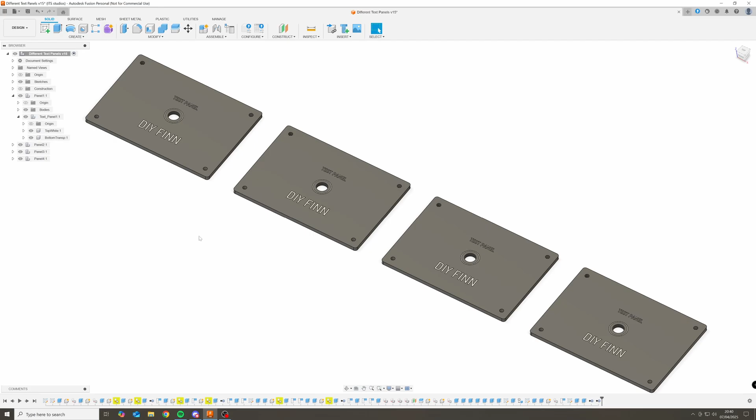Let's get to the design part. Here in Fusion you can see all our 4 iterations. Starting from the first one, the top surface looks the same on all of these, but on the back is where the differences become evident. In our first iteration we had this transparent layer on the back, and then on top we have one layer of white, and this was in our minds the best way to do it.

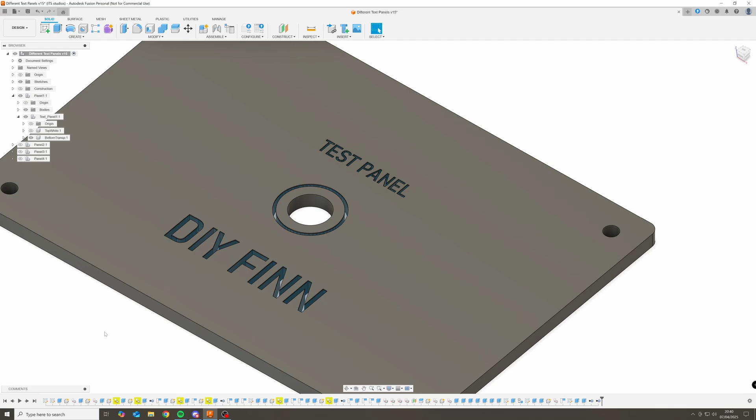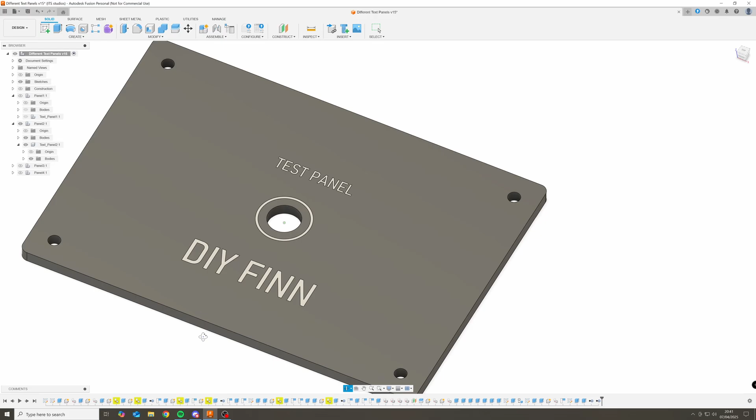Here we have our second iteration, where we realized that we don't need the transparent filling on the back because air lets light pass through easier than plastic. We removed the plastic part and made the white part a couple of layers thick, and this resulted in this sort of looking panel, and the results were way better in backlighting performance, as you can see when we compare these.

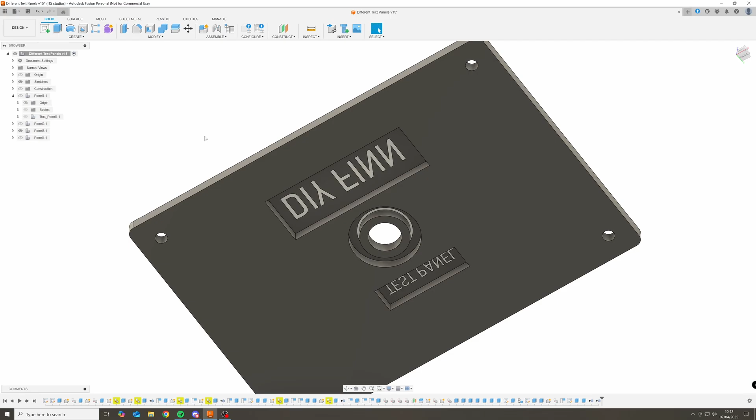Our third option even further optimized the backlighting pass-through by adding deep grooves in the panel on the backside, which allow more light to reach the white text area. The problem with this design, though, was that it lets light pass through the gray area as well, so we did our fourth and final iteration to combat this issue.

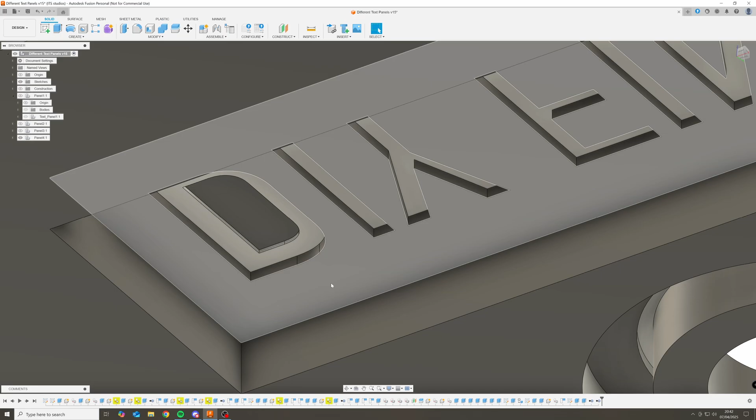In the fourth and current version we have the backside extruded out, but the difference comes in this about 6-layer-thick gray part that is extruded from the text. This enables us to have backlighting that passes through very easily to the white text, but it doesn't shine through the gray parts. Now that I've shown you our iterations and why the fourth option is the best, I'm going to show you exactly how to make this sort of panel step by step, and you can repeat it at home.

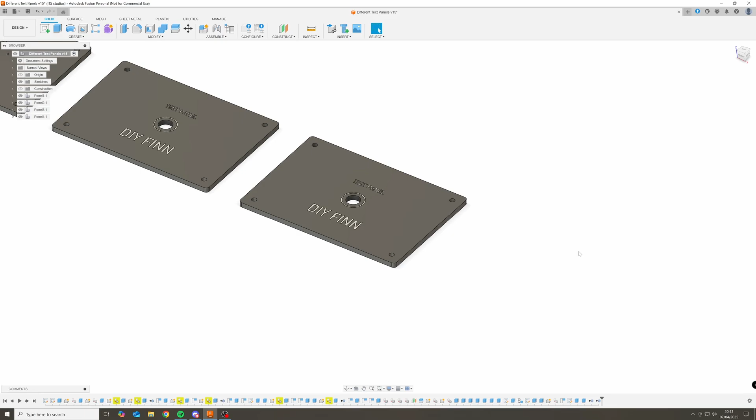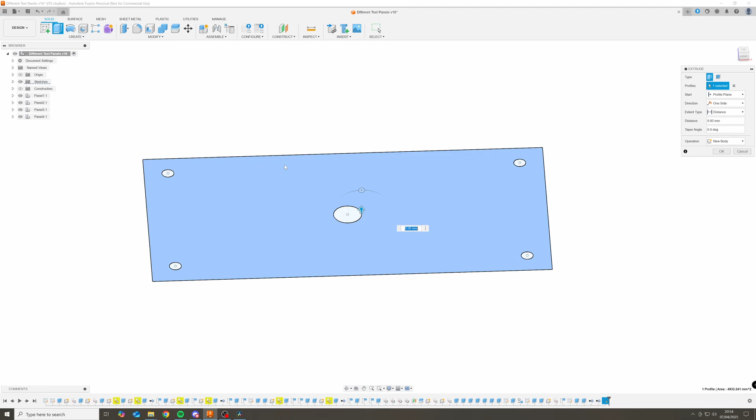Okay, so first we created this sketch, and then we made a rectangle sized 100 by 50 millimeters. Then we created 4 3mm holes, and then one hole in the middle which is 7mm in diameter. After that we were ready to extrude it by 3mm.

While we're at it, why not make some 3mm fillets to make it look good. After all these previous steps we could now start the text, so we needed to create a sketch on the top layer for that.

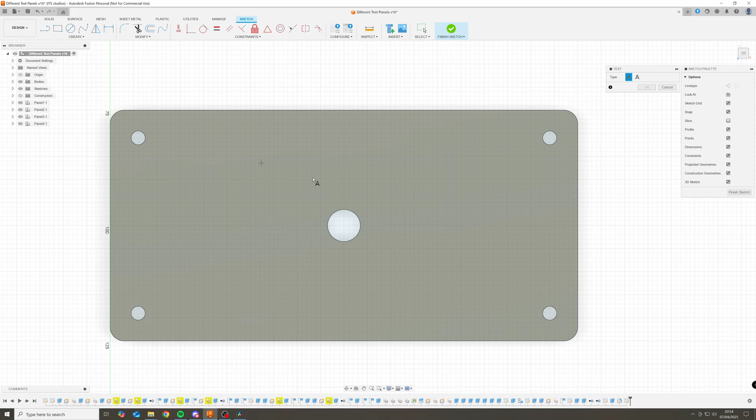Text can be made by selecting the text tool, and we made this rectangle here, which we will place the text in, and we wrote 'test sample'. The height will be 4mm with Bahnschrift SemiCondensed font, and typically we don't use any bolding, but you can use that.

The minimum font size should be about 2.9 to 2.6mm, but it of course depends on the nozzle size. This is good for a 0.2mm nozzle.

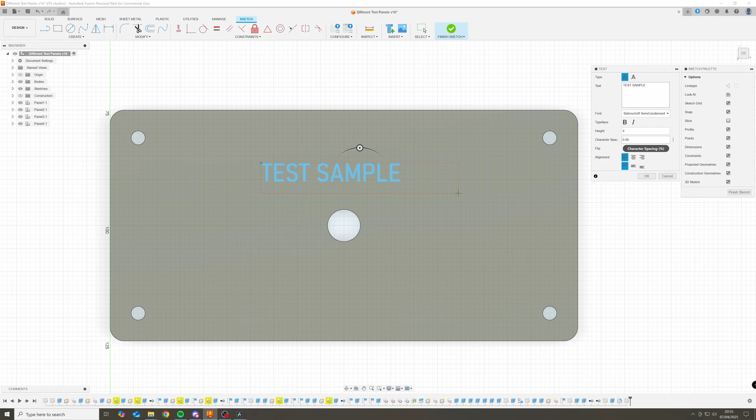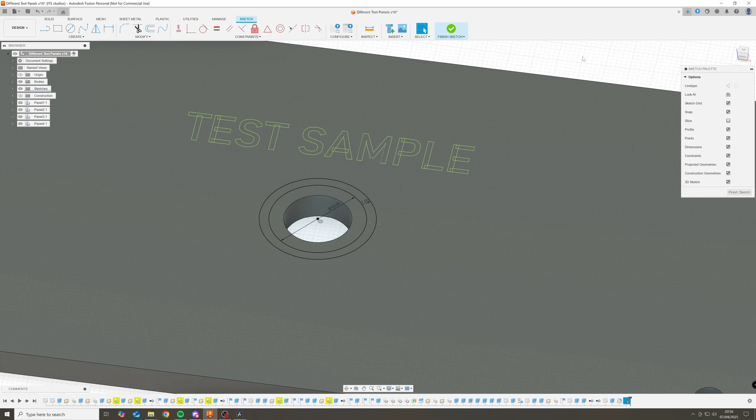For this test sample we also made another layer, which is this circle around the hole, about 1mm in size. Once we had every piece of the backlight done here, we do this very important step to explode the text, and just like that we have basically the backlight layer sketch complete.

Then we select these parts and press invert selection, which is the fastest way to select the text. Then we just unselect the parts we don't want to extrude down.

After that we extrude it by our layer height, which is minus 0.14 millimeters, and then we multiply that by 2 because we need 2 layers.

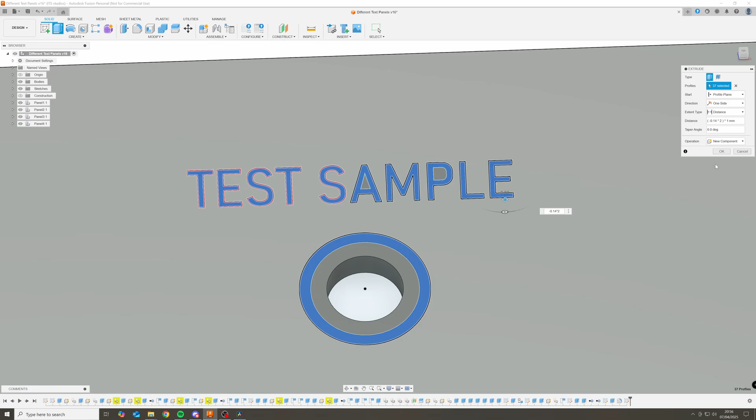Then we create a new component of it from this menu here and press OK, and just like that we have this new component, which includes the backlight text.

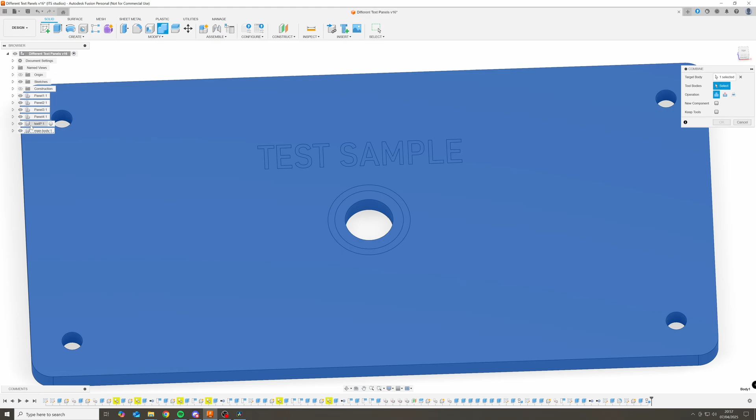And here comes an important step again: we need to create a component from this body, which will be named main body. After that we can go to the top menu, press the combine tool, then select the main body from here and select all of the bodies from the texts, then press cut and keep tools.

And just like that we can see we have cut the text from the main body. We can hide this, for example, and see that it is cut from the body.

The next thing to do is of course the square opening on the back side of the board, so let's do that next.

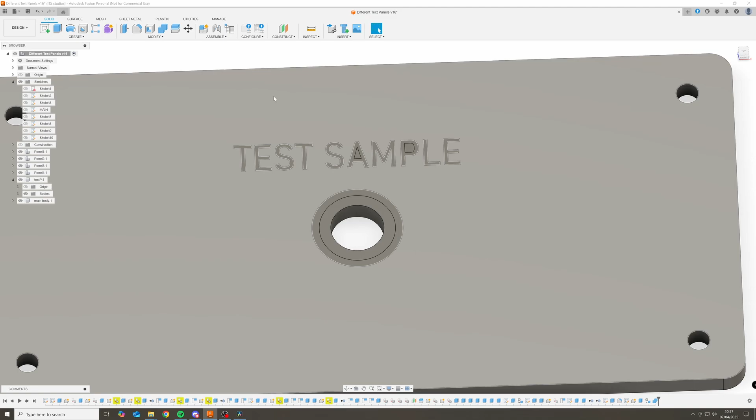First make sure to hide the text component, then open the sketch for the text, so it makes it easier to do this next sketch on the bottom side.

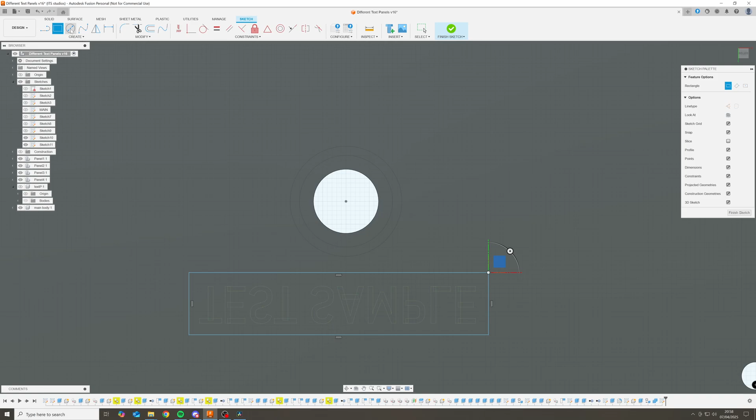Then make a square or rectangle on the back side, just like you want to do, and it should be pretty much the same dimension as the text, but a little bit wider so the light gets through it better. Then select the previously created components you just made and extrude them to the top layer, just like so.

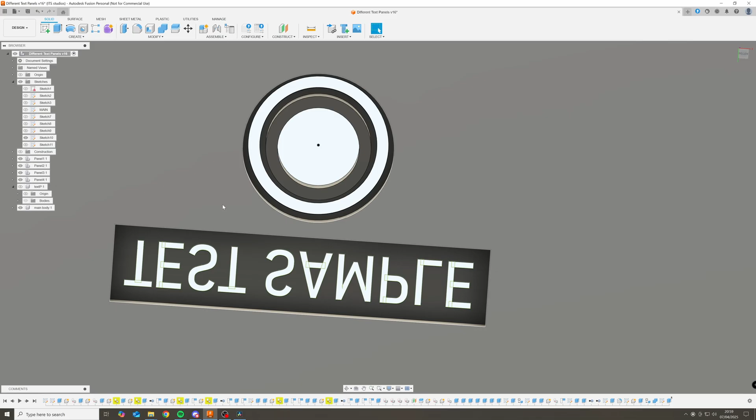Now for the last and most important step: select all of the remaining parts underside here, including all of the text too, and after that extrude it by our layer height times 4, which will ensure the light doesn't bleed after we print this panel, and it should be perfect.

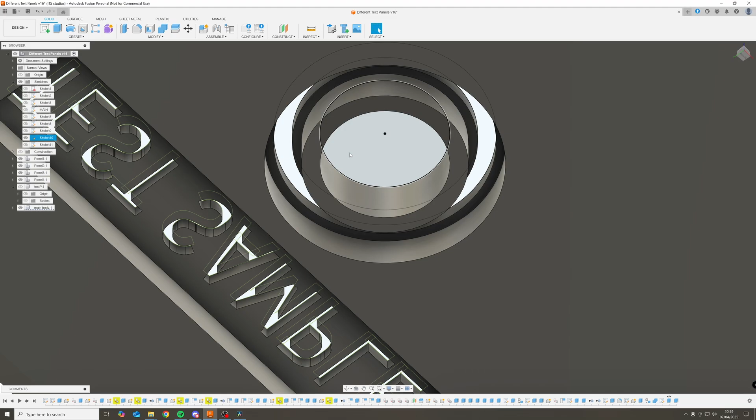And after we apply this material on it, or a different color, it is so much easier to understand how this looks.

Now that we have the text and the main body all modeled in and ready to export, ready to 3D print, one thing I suggest you do is go in the bodies, select all the bodies, click F2, and rename these something like main, so it renames all the bodies.

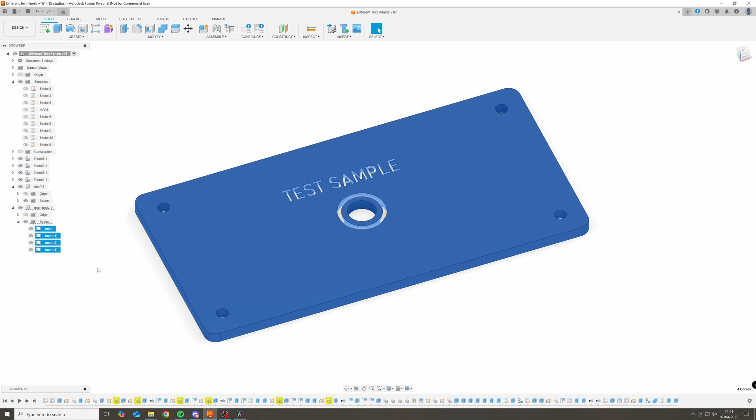Do the same with the text here, select all the text, click F2, name it text. This way, now that we are going to be exporting these, it's going to be easy to see on Bambu Slicer which are the text and which is the main body, because it's kind of hard to realize which is which, and you will see what I mean when we are in there.

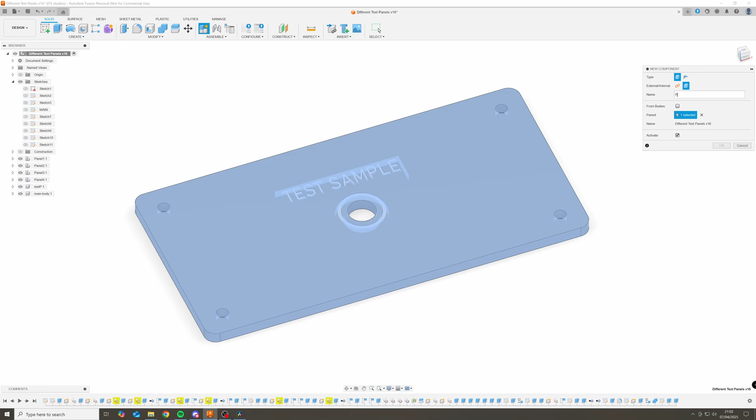And here we can go ahead and save as mesh. You want to use 3MF, one file, and select OK. And then you can export it to wherever you want.

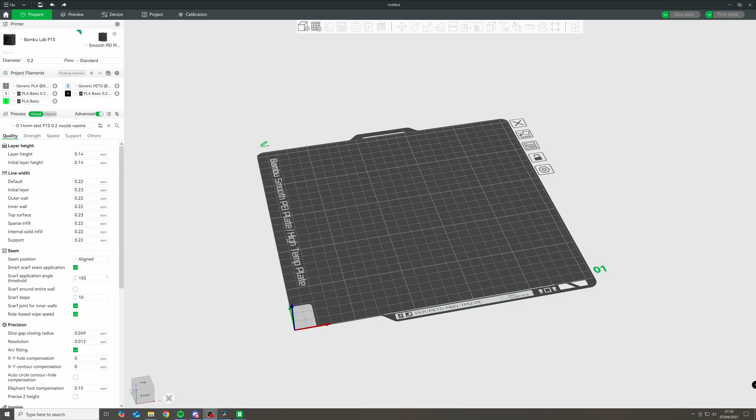And here we are in Bambu Studio, and we're going to bring in our panel here, our 3MF file. This is some random bug in BambuLab right now, which says the 3MF file was generated by an older version of Bambu. Just click OK, it doesn't matter. And this is another bug, which says the object is too small. Just click no, it's not. And then lastly, file contains several objects positioned at multiple heights.

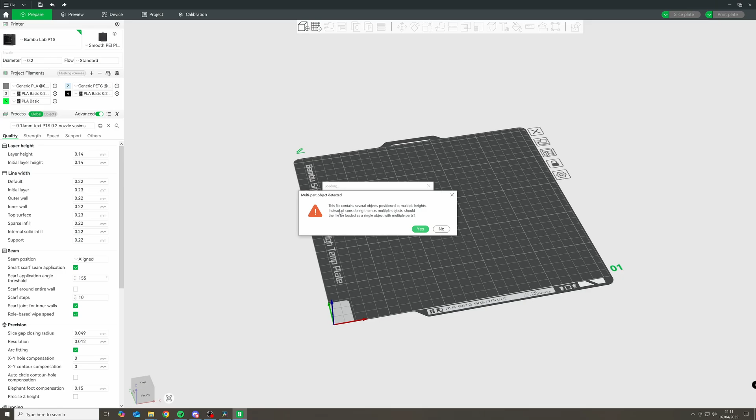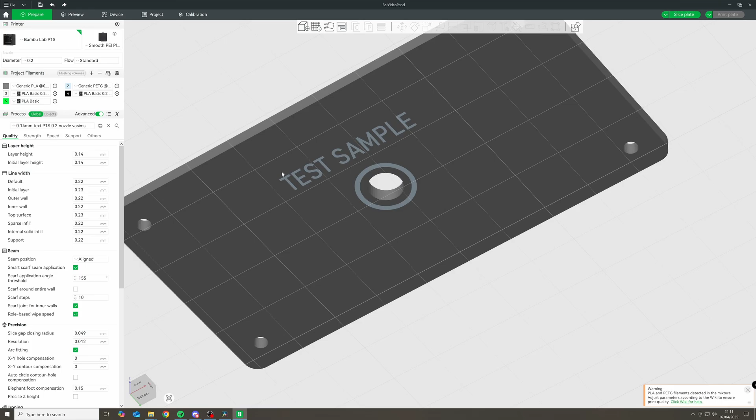Click yes here, and you can see our panel with the text appears here. Key thing with the panel is that you want to rotate it with the text facing the bed. This yields the best results, so you can do that. And here, the text against the bed will keep a really nice and uniform texture, unlike if you were printing it face up.

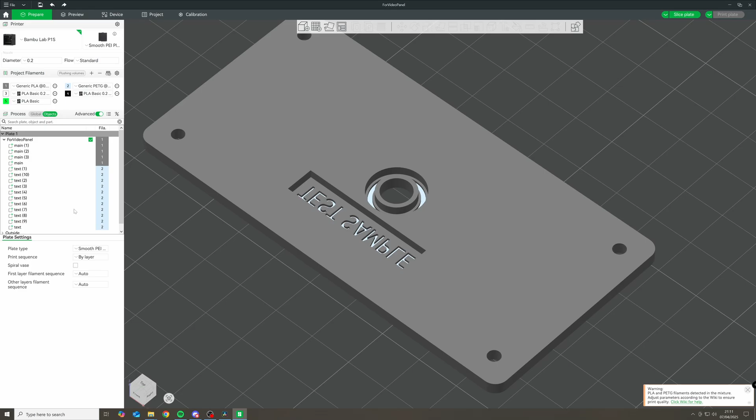Now to select the colors, even though this is okay colors right now, if yours didn't look like this when you started, you can go into the process and click on the object, and it opens every single object as an individual component here. Just select a color, in our case the text, right click and set filament for selected items. I want to select this Bambu PLA basic white filament, and you can see it selected the color. For me the gray is fine for the main body.

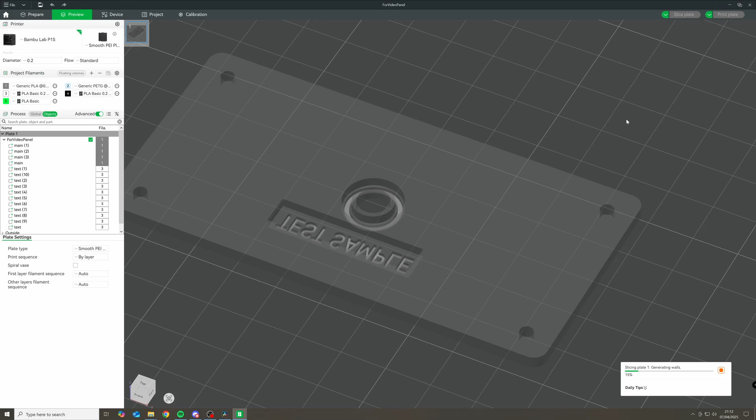We can click on slice plate, and with the settings that I'm using, it takes about 2 hours and 14 minutes to print this. Now it doesn't show you the different colors here. I don't know why that is, but it does print them in dual color regardless, and you see that it does pretty nicely.